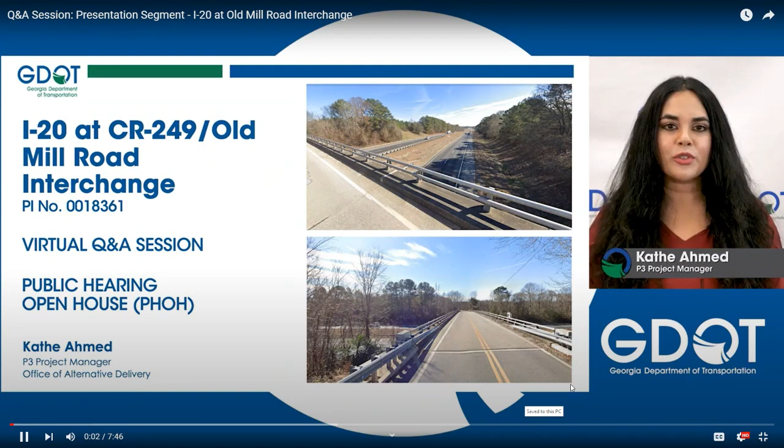So next, we're going to go to Kathe Ahmed, who again is our project manager with GDOT's Office of Alternative Delivery. Take it away, Kathe. Thank you, Kyle, and thank you to everyone for joining us today to learn more about the I-20 at County Road 249, Old Mill Road Interchange project, PI number 0018361. Let's begin.

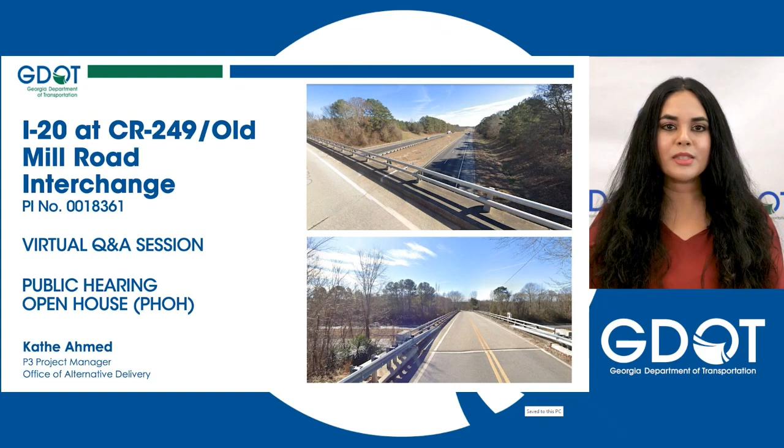The I-20 at Old Mill Road Interchange project was initially presented during the Public Information Open House, or PIOH, in June of 2022 as part of the US 278 widening and Old Mill Road improvement projects. This proposed interchange will provide new direct access to I-20 at Old Mill Road in Morgan and Walton counties and will provide congestion relief for anticipated future traffic volumes.

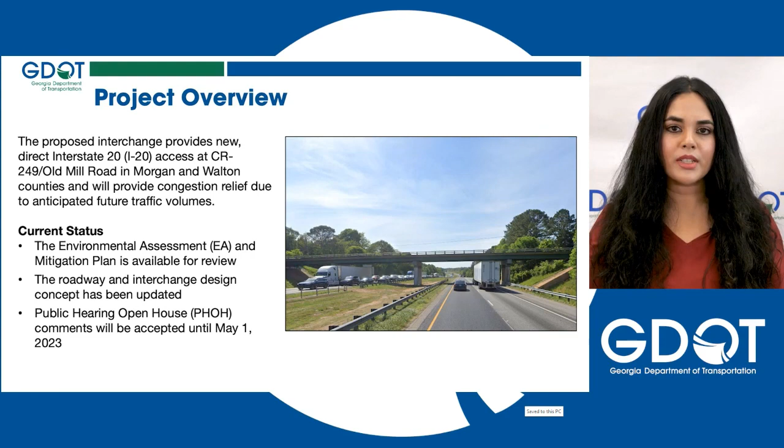At this time, the updated project design concept, environmental assessment (EA), and mitigation plan is available for review and public comment. We are hosting a public hearing open house comment period and accepting comments until Monday, May 1st.

As part of the proposed project design, a new bridge will be constructed to the west of the existing Old Mill Road overpass, and the old bridge will be removed. Old Mill Road will also be realigned to the west to align with the new interchange location. The portion of Old Mill Road in the vicinity of the new interchange will be widened from a 2-lane section to a 4-lane section with a raised median.

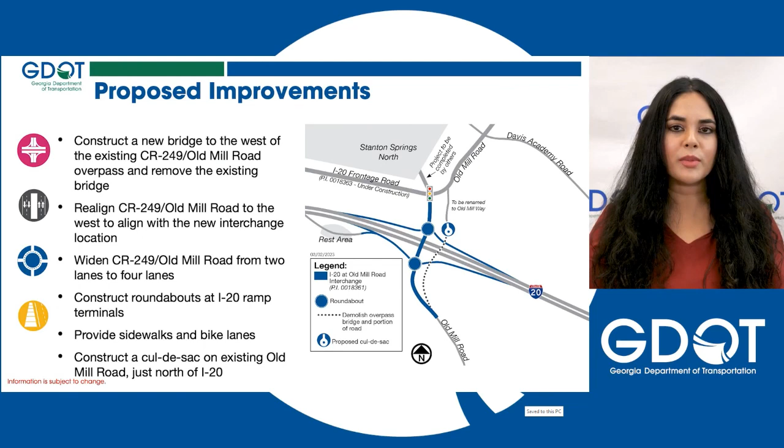Roundabouts will be constructed at the I-20 ramp terminals. The design also includes pedestrian sidewalks and bike lanes. The existing Old Mill Road just north of I-20 will be changed to Old Mill Way, and a cul-de-sac will be constructed allowing local access for property owners.

As a result of public input and further assessment, the list of improvements was refined and may look different from what you may have viewed at the PIOH last June. The latest design concept now includes the addition of bike lanes along the proposed realigned Old Mill Road from the northern roundabout up to the intersection with the frontage road.

A 5-foot sidewalk is also proposed along the same segment of road. However, south of the northern roundabout down to the southern roundabout at the eastbound I-20 off and on ramps, there will be no separate bike lanes. Along this segment, the sidewalk will be widened to 10 feet. Also, the previously proposed cul-de-sac on the existing Old Mill Road south of I-20 has been removed.

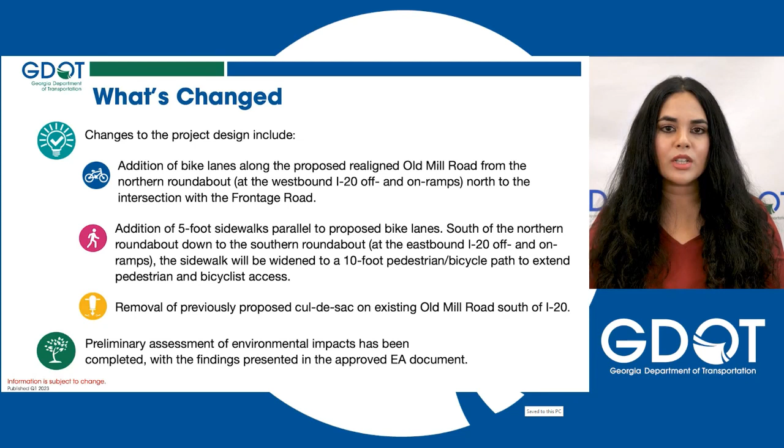At this time, the preliminary assessment of environmental impacts is complete. The findings can be found in the approved EA document on the project website.

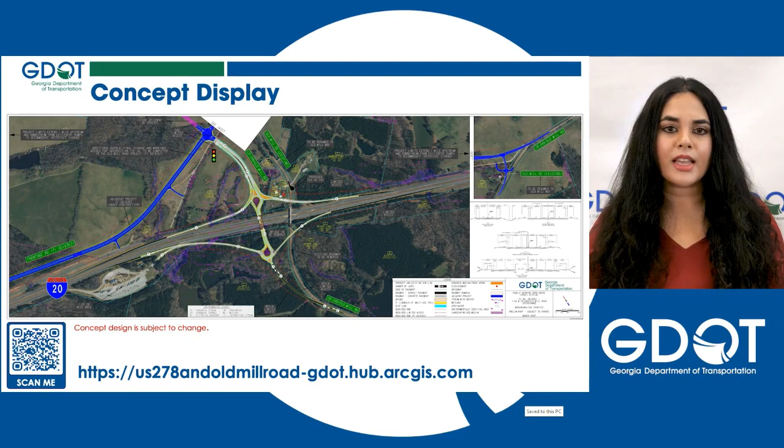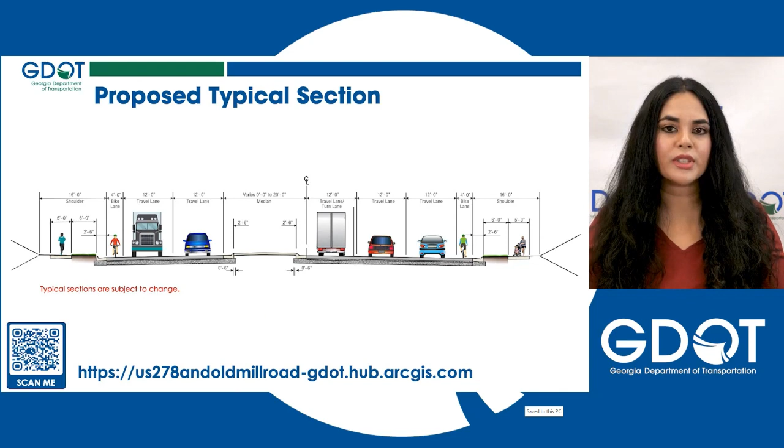As part of the public hearing open house comment period, we encourage you to submit comments following your review of the updated proposed project design concept and any areas located within the project limits that may be important to you.

This proposed interchange project brings several benefits to this corridor of I-20. Without this project, traffic congestion is projected to worsen at the adjacent interchanges and roadways. Traffic operations on I-20 in the vicinity would deteriorate during peak hours. This proposed project offers several benefits to mitigate these issues.

It will not only offer direct access to an interstate system, but also provide congestion relief and divert traffic away from other local roads and intersections. In addition, it will improve operations to accommodate future traffic volumes. The proposed design also benefits pedestrians and bicyclists with the addition of sidewalks and bike lanes.

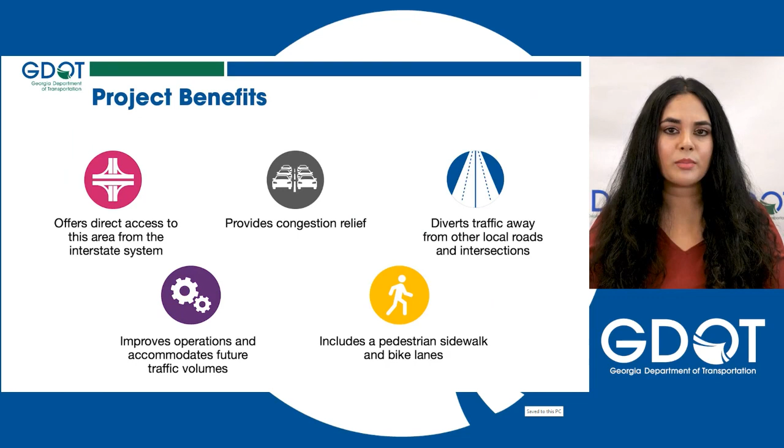That concludes our presentation for the proposed I-20 at Old Mill Road Interchange project. On the project website, we encourage you to visit the virtual meeting room platform to view these project resources on your own time. You can view the latest concept layouts, anticipated right-of-way needs, the environmental assessment document, as well as other project details that you might find at an in-person Georgia DOT open house. Once you have viewed the materials, you will also have the opportunity to provide comments on the proposed project.

We will also offer an in-person public hearing open house tomorrow, April 20th, at the South Walton Community Center. If you have any family, friends, or neighbors that are not able to join us today, we hope you tell them to stop by. All the information presented here today and updated displays and resources that are on the project website will also be available tomorrow at the in-person open house. Again, thank you for joining our virtual presentation, and we look forward to hearing from you during our question and answer session in just a few minutes.

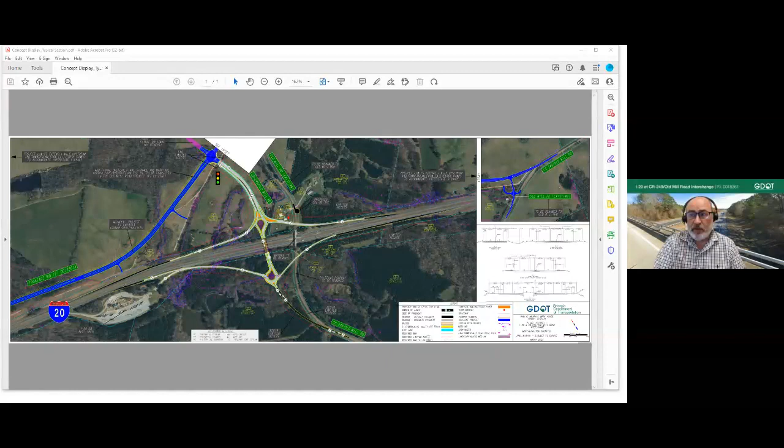Yeah, absolutely. So we did look at several different options for the intersection control at the interchange and at the ramp terminals there. Based on some of the traffic patterns and turning movements that would be turning onto or coming from I-20, we found that the most efficient method of servicing that traffic and those volumes was by implementing this roundabout. One of the things roundabouts are really great at, as opposed to a signal, is you're not really waiting at them. You get up there, if there's a gap in the traffic, you get in your lane and you go. So they're very efficient.

They are anticipated to cut down on some of the anticipated congestion through that area. In addition, they're much safer than a traditional intersection. I believe there's something like only a third as many conflict points at a roundabout versus an intersection. So safety and efficiency are some of the primary reasons for using it.

Another reason is that we are anticipating a lot of truck traffic here, so these roundabouts have been specifically designed to handle some of the larger trucks anticipated in this area. We've actually designed it so those trucks can go through the roundabout side by side if need be, so you won't have trucks or trailers swinging into the adjacent lanes and causing issues at these intersections. Thanks for the question.

Definitely a good answer there, Ty, because we get a lot of comments on social media about the size of roundabouts. These are going to be full scale, and like Ty mentioned, able to handle multiple trucks at one time once implemented.

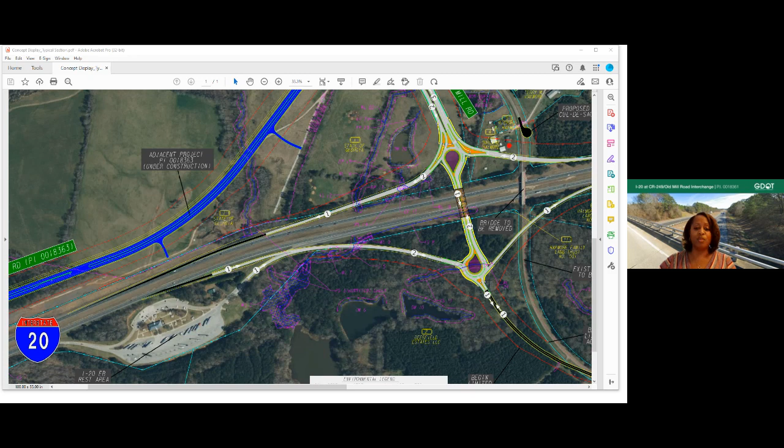That rest area is an important part of the transportation network that GDOT also wants to ensure access to and from is accommodated for. So I will ask Jonathan Langley, since we have the layout here on the screen, to walk through what we're doing here in relation to the rest area.

Thank you, Marlo. I'd love to do that. Good afternoon, everybody. I'd like to get to the point where we talk about the rest area, but since we have some time and it gives you more time to ask questions, I'd like to help you decode what you're looking at on the screen.

When you look at one of these layouts, we sometimes call them roll plots, layouts, or concept layouts - you may hear different terms. I'm going to tell you a bit about what you're seeing, and then make my way towards talking about the ramp and rest area we were just discussing.

So what you see here, the area we're talking about with the interchange is going to be towards the center of the screen. Right now it's a little bit over towards the right, and there's a bunch of different lines and different colors.

So what I'd like to do, if we can zoom in towards the interchange to start, is point out what some of these different colors mean and what the different lines mean, so that when you're looking at this you have a better understanding of what you actually see.

And bonus points if you go to the GDOT website and pull up this plot yourself - you can zoom into it and look at it on your own, and you'll have a better understanding of what it is that you're working with here.

So the first thing we'll point out is the light gray shape, which is the roadway. That's what you see in the center of the screen when we talk about the ramps, the bridge, and the roundabouts - all of that main color you see right there, the gray, is the roadway.

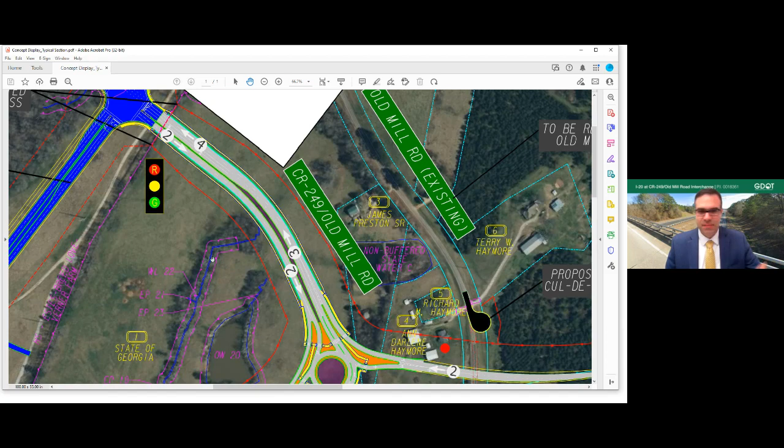All right, you see a stoplight signal there. We could go on describing this plot for a long time, just helping you decode it, but the main goal here was to hopefully help you understand, when you look at this, what are you actually looking at. Maybe I'll think of some other things to share as we continue.

On the bottom left of your screen now you see the aerial image of the rest area. The existing condition is that the rest area currently exits directly onto the interstate. So say you were driving along and pulled into this rest area, went inside, got back in your vehicle, and now needed to get back onto the interstate - in the existing condition, you would exit that ramp, as you see in the aerial image, and go right back onto the interstate.

The situation in this specific project is that by adding a new interchange, you end up with a ramp coming from the rest area very close to where we need to have a new interchange. Because of those lengths, these are too close to each other to be able to have separate ramps. As part of our concept development process, we look at a variety of different alternatives.

As we looked at the different alternatives for an interchange in this location, it became very apparent that the safest configuration for all vehicles was to allow that traffic to merge together on this ramp before going back onto the interstate.

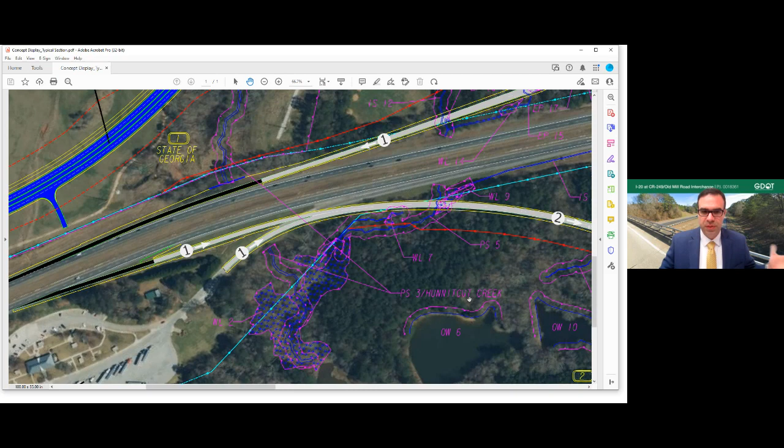There's plenty of distance between where these two come together and the roundabout if any lane changing were to need to happen, but that's not a requirement. So a vehicle leaving the rest area and going back to the interstate is just going to go up this ramp with its own dedicated lane, moving right into the roundabout, around it, and back onto the interstate. It's a very seamless movement — they won't be forced to merge with other vehicles.

That saves some of the issues other alternatives would have, where merging or weaving would be happening on the interstate, which would not be as safe as this configuration. As Ty mentioned earlier, with a roundabout you don't have a signal, so vehicles don't need to stop at this location — it's a yield condition, so you find your gap and move right through the roundabout.

I'll pause for a moment, and maybe we get a chance to come back and look at some of the other movements later. Kyle, I'll check if we've had any questions come in while I've been talking. Hopefully that helps everyone understand a bit about what's going on in the rest area, the individual lanes for each movement, and how they interface with the roundabout and the interstate.

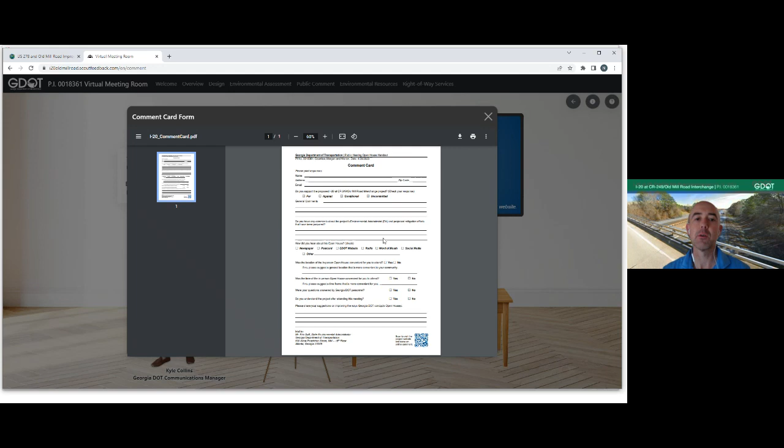So also the public comment, if we want to click on that next. And there is me, my little self, that's my avatar there. So you can print off the comment card if you wanted to mail one in, or you could do the online comment card, which is to the right of that comment form. That's a simple, 3, 4, 5 minute process just to leave some basic information and get your comment onto the official record. And all those comments will be responded to.

Typically, it takes us 45 to 60 days, and everybody who left their contact information is going to get that letter, and that'll also be published on this official website once it's finalized. So if folks are curious about what people were asking about, or if you ask the question, you can also kind of view things there. So very helpful.

And Amber, I may kind of put you on the spot here. I know we talked about this before. Could you kind of expand on this virtual meeting room and our whole expansive virtual public involvement that we've really made more robust the last few years, and why we think that's a good way to reach the public?

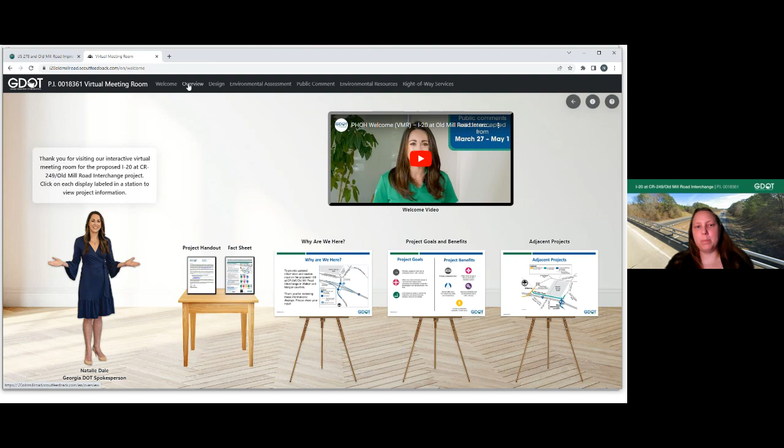Yeah, certainly. So we've definitely worked hard over the last few years, and it started before COVID. We actually conducted a few virtual public outreach efforts that were an early version of what you see today. As a result, if you go to our comment card, we asked for feedback from the public about ways we can improve meetings. And we were seeing that citizens of the state of Georgia had a desire for us to go virtual, allow a time period that they could ask virtual questions, get their responses live, instead of having to just submit comments.

And wait while we respond to a large number of comments, so that they would be able to mirror what we were doing at an in-person meeting if they couldn't make that day, so everyone could have the opportunity to, as you mentioned, view the materials at their leisure. So we worked very hard to update our website platform so that we could offer all the same materials that you would see at an in-person meeting at all of the citizens of Georgia's convenience, and that they could go back and look at all of the information as the project develops.

And we can easily update that website for citizens to get updated information more quickly as the project progresses. So that's definitely one of the positives. As a result, we've also been able to update how we advertise and send out notifications to our meetings, which have also improved. But if anyone listening today, or if you check out this website at a later date, please provide your feedback for ways we can improve. We're always looking to make updates and improvements, especially with new technologies that may be out there. So thank you so much for that.

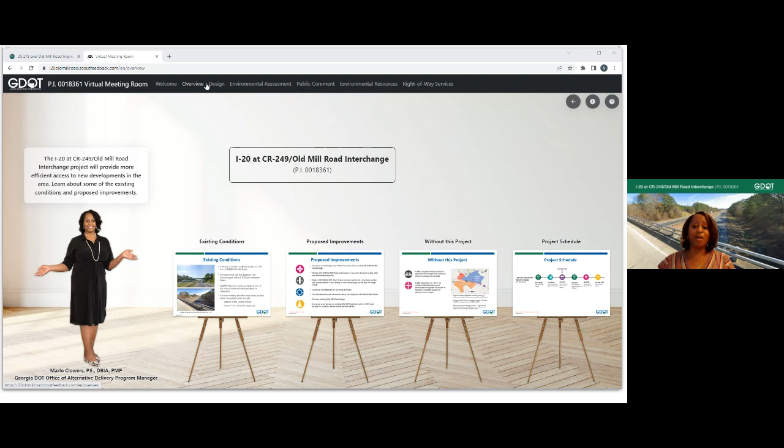Yes, Kyle. So we did take feedback from that public information open house that was held last year, and the design concepts were updated to reflect a lot of that input, as well as additional studies that have been conducted since that meeting last year. But I will ask Jonathan to talk about some of the changes from the meeting held last year.

Thanks, Marlo. I'd be happy to do that. We heard Ty talk a little bit about this earlier, but some of the latest additions include bike lanes and pedestrian facilities along the roadway there. One thing I'll point out is that we come to you at different points in the project so we can hear feedback and have time to incorporate it before everything is finalized and before it goes to construction. So at this point, the PHOH is not the first time we've had the opportunity to hear from you and share our design and what's going on here.

From that high level, what we did was listen to the feedback we got early in that PIOH that Marlo talked about, and then incorporate that information into our designs. Meanwhile, there is additional design, additional analyses and other things going on behind the scenes as we get closer to the beginning of construction. So everything is developing. Just like any process, as you move along, things get more detailed and more refined. That's another thing.

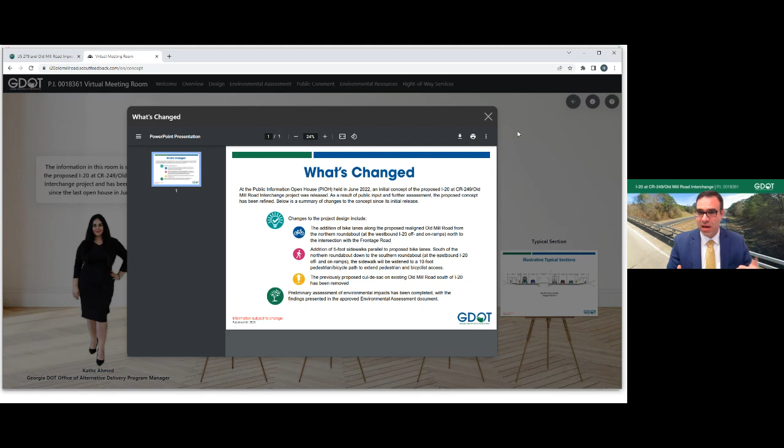If you were to look at the layouts on the website now, you'd see a greater level of refinement. There are more details included in the layouts, and a greater level of accuracy at this point than in the past, because every day, every week, every month that goes by, we're putting more effort into getting closer to a final product. Marlo also talked about that design build process, and there is yet more design to be done before construction happens. Marlo shared the schedule with us a few minutes ago and talked about selecting that contractor. The final designer comes on board at the same time, and they'll take the design from where it is at this point and take it across the finish line.

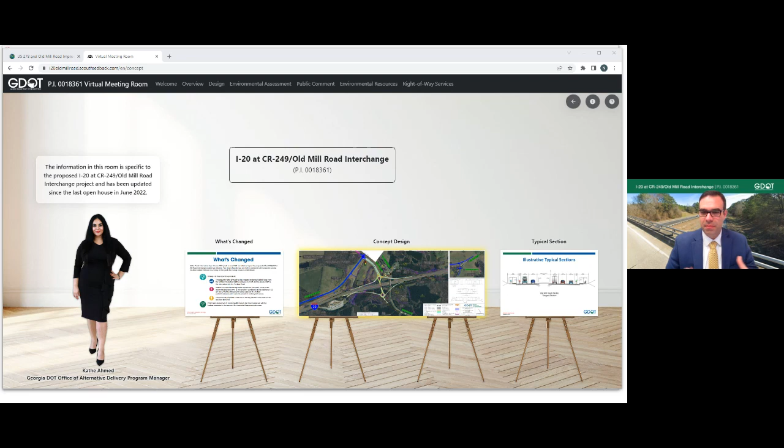So we're at a point partway through the process and intentionally reaching out to you now so that we can hear from you, get your feedback, and so that where appropriate, things get incorporated, like what we talked about here. Maybe Ty, if you don't mind, I'll throw it to you to talk a little more about some of the specific design elements, some adjustments that happened along Old Mill Road, and the finer tuned refinements between our previous layout and what we have now.

Sure thing. So I wasn't sure, Jonathan, if you had mentioned one of the changes. If you could pan the display just up a little bit here, you'll see that little black circle - that's a proposed cul-de-sac. So the existing Old Mill Road is going to be removed. Portions of the existing Old Mill Road are going to be removed, and from that cul-de-sac south, across the interstate, Old Mill Road is going to be removed. One of the changes you'll see is that we had also proposed a cul-de-sac on the south side of I-20.

But after looking into that a little more, you can see most of that land is vacant currently - there's really only one property owner there. There wasn't necessarily a need to maintain that road, which would have essentially just been a dead end. So that's one of the changes - we are removing that portion of Old Mill Road south of the interstate, up to the point where the new project ties into the existing road.

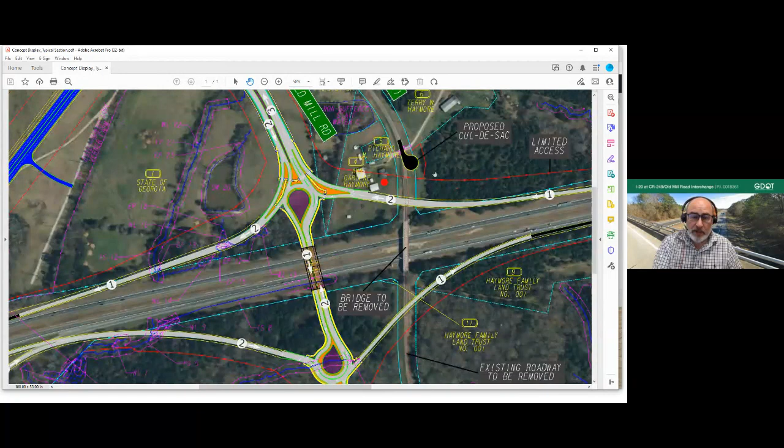So all of those residents along Old Mill Road north of the interstate - it's kind of hard to see because we have a clip out up there - that road is going to be maintained, and access to those residents will be maintained. They can obviously make a safe turnaround at that cul-de-sac. I'm trying to think of any other changes. You'd already mentioned the sidewalks, the addition of the sidewalks, but I think that's one of the major changes - the removal of Old Mill Road south of the interstate.

The other thing we could bring up is that, understanding we're moving Old Mill Road and it's still going to be named Old Mill Road, we had to figure out what to do with the name of the portion of existing Old Mill Road that was going to stay there. So that road name is going to change. Currently, what we believe the road is going to be named is Old Mill Way. People that live along that road will have an address change - they will be contacted about this, and a lot of this will be worked out in the background through the post office and other government agencies. We are asking for feedback on the naming of that road - if you guys have any opinions, we would welcome your input. Unless you can think of anything else, I believe that is the majority of what has changed.

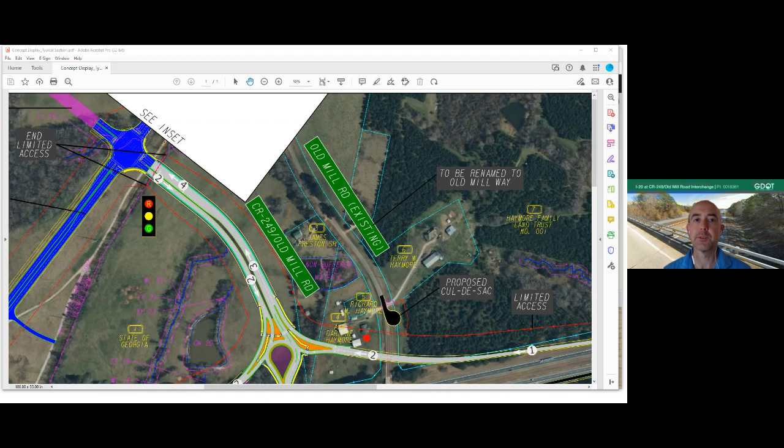Thanks, Ty. And while you're hot, and while we have the concept display still up, could you talk us through that teardrop look? It kind of looks like that's the appearance of those roundabouts, and how that may differ from a normal roundabout folks would see at a typical intersection on the state highway system.

Sure, Kyle. So functionally - well, first of all, we call these teardrop roundabouts, and the biggest difference you can see if you look at it is that each one of these roundabouts doesn't go in a complete circle. Most roundabouts, if you want to make a U-turn, you could just go around in a complete circle. So functionally, these roundabouts function just like any other roundabout, except for the fact that you can't make a U-turn at each one of these intersections.

In order to make a U-turn, since these two roundabouts are operating in tandem, they sort of operate with each other. To make that U-turn movement, if you were coming up Old Mill Road from the south going north, you would go through the intersection, go to the next roundabout, make a U-turn there, and come back and proceed the other direction. That movement, based on the spacing of the intersections and anticipated speeds, will probably take about 30 seconds to a minute. So it might be confusing to some folks initially - how do I make a U-turn? Well, you'll just go to the next roundabout, make your U-turn, and proceed back the opposite direction.

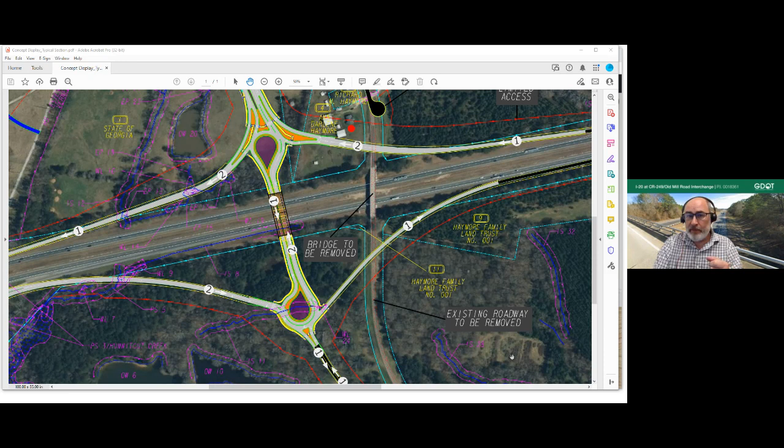But functionally, there's no difference with these roundabouts. The great thing about roundabouts is that you only have to look for traffic coming from your left. There's not going to be anybody coming from the other direction, so your head's not on a swivel as much at roundabouts in general. They're just a little bit safer than other intersections, but they also allow you to focus your attention on just one direction of traffic. So hopefully that answers your question, Kyle.

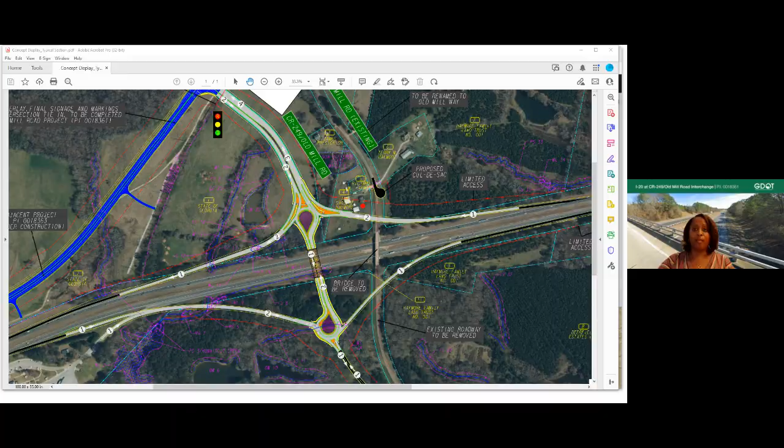I will ask Ty if you can add a little more detail as to the reasoning behind not just using the existing bridge. Yep, absolutely. So there are actually several reasons we didn't use the existing bridge. Number one, the bridge is only a 2-lane bridge, and the traffic we're anticipating would be more than a 2-lane bridge can handle, so we need to widen out that bridge to provide additional lanes.

Another reason to not utilize that existing bridge is that some of the anticipated truck volumes and truck traffic through here could potentially impact or damage the existing bridge. It's an older bridge, and all of that traffic could potentially cause issues with that.

And then a third reason for constructing this in a new location and not utilizing that existing bridge is that with this swell in traffic in this area, we can direct traffic going to those developments directly to where they're supposed to be, and they won't have to use a lot of the side roads such as Old Mill Road or Davis Academy to reach their destination. So we won't have those trucks going through the middle of people's neighborhoods on Old Mill Road. Those are some of the primary reasons.

And a fourth point would be, by doing this, we can also minimize some of the impacts to the surrounding residents. We did look quite a bit at trying to mitigate some of these impacts on people who live in this area. Thanks for the question.

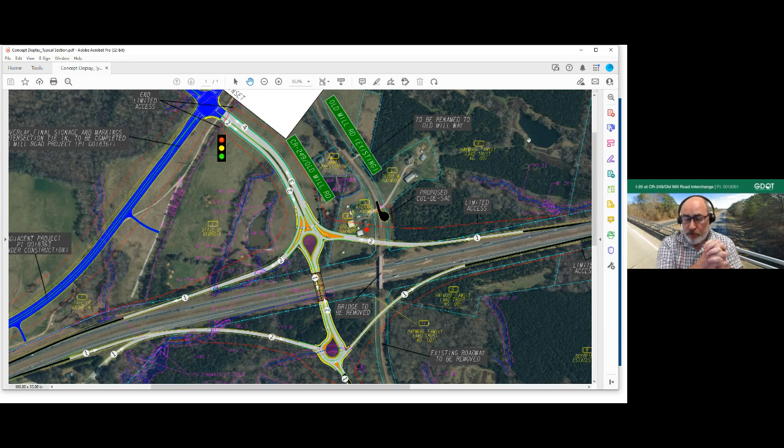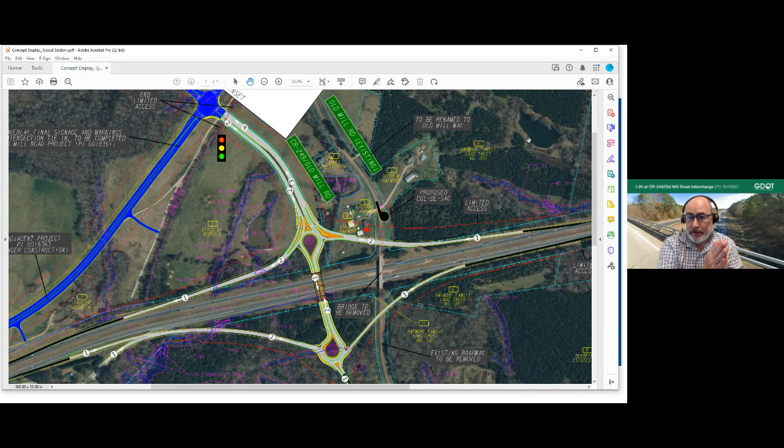I will ask Ty to talk about how traffic will be prevented from going north on Old Mill Road. Sure. Old Mill Road is a public road, and it's going to continue to be a public road. So unless the restrictions—the truck restrictions that are currently there—any of those restrictions will be retained. If it's currently signed as a no truck route, it will continue to be signed as a no truck route. Unfortunately, there's not much we can do about that. We can put up the signs, but people don't always pay attention to them. The best thing to do if you're experiencing problems is to contact some of your local officials or the police. That really becomes sort of an enforcement issue, and unfortunately there's only so much we can do to mitigate that problem.

Thanks for the question, though.

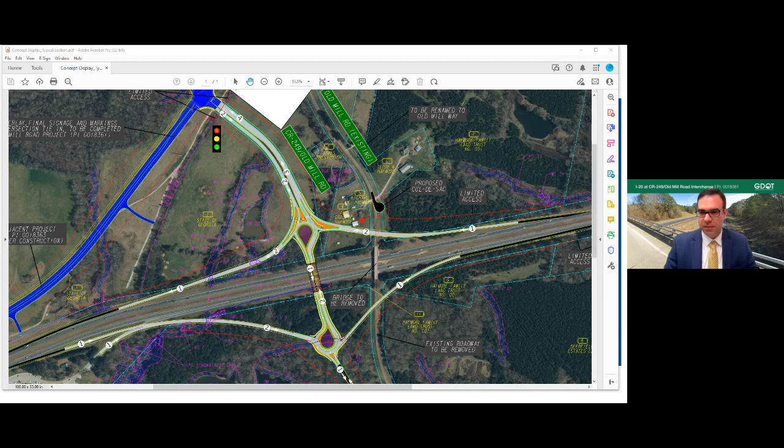I welcome anybody who has specific questions about the process, from beginning to where we are now. Please, if you haven't already, ask your questions, come out and visit us in person at this public hearing open house tomorrow night. There's still more process to go beyond these conversations. We're not at final design yet, and before construction begins, there's still more work to be done. So this is all part of that process.

Marlo, thanks for giving me the opportunity to talk a little bit about it, because it is a very interesting thing, at least to me. I think it's valuable to understand how we got to where we are today. So with that, Kyle, I'll hand it back over to you.